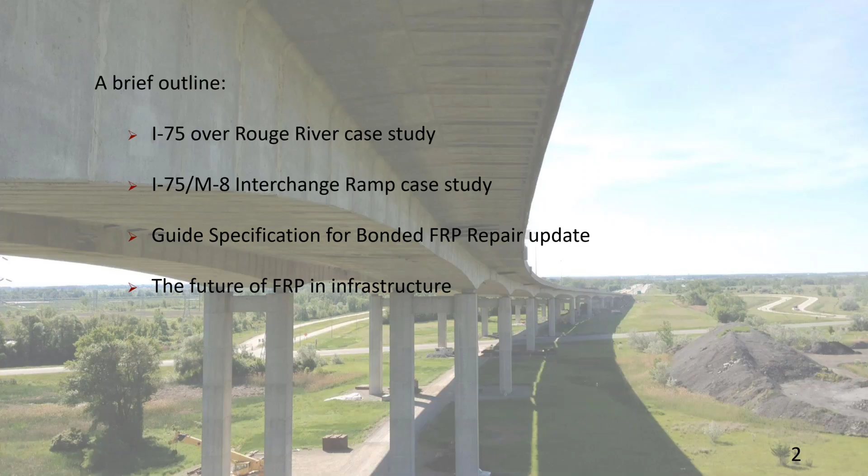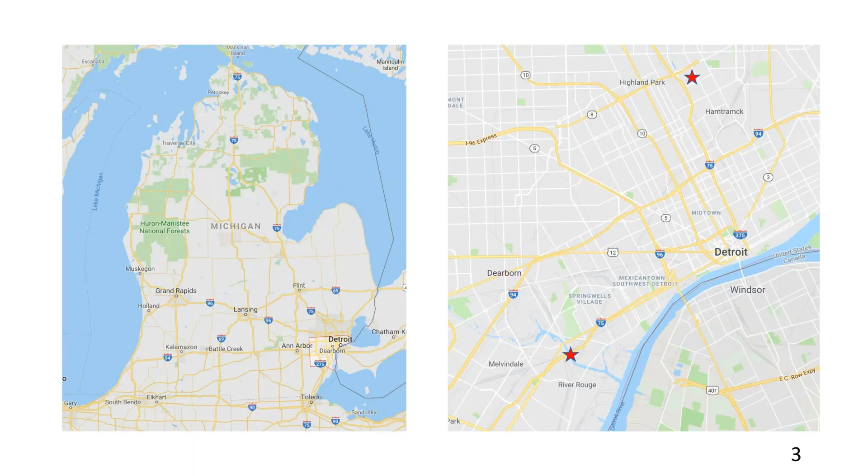So how are these FRP bonded systems relevant to ABC? How is it relevant to our movement towards accelerated construction and less user delay? Well, the use of the bonded FRP systems actually resulted on these two projects we're going to talk about today in no impacts to freeway traffic above and very little impact to the local traffic below, just in terms of staging and equipment access.

So you're driving over the freeway, you would never know that we were working on these bridges. The systems can be installed fairly quickly, either via pre-qualified contract or contractor, as the first one will show, or using direct force maintenance staff, which is how we did the second project that we're going to show today. So the strengthening or confining of these elements is a viable option for long-term asset management, which can delay replacement. If these elements are replaced, that's a huge impact to mobility and traffic. So that's how these systems can be relevant to an ABC type of application.

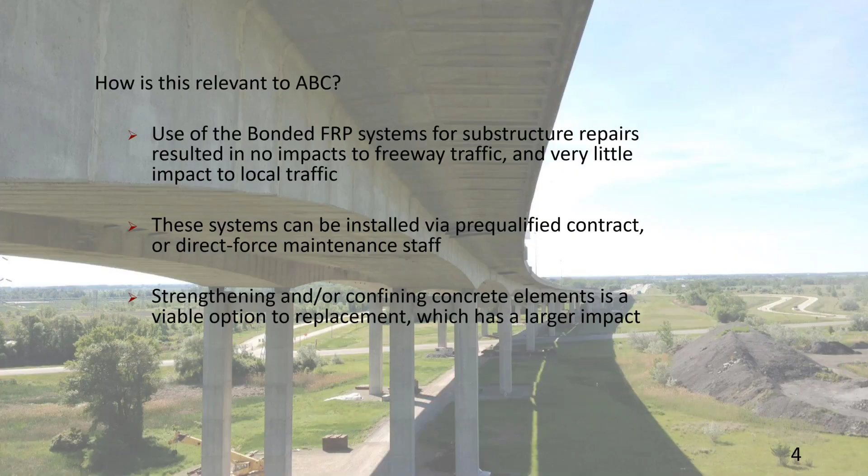So the first project we want to talk about is our I-75 bridge over the Rouge River. This is a 109 span composite steel structure consisting of many cantilever and continuous spans with a main 3-span continuous unit over the Rouge River.

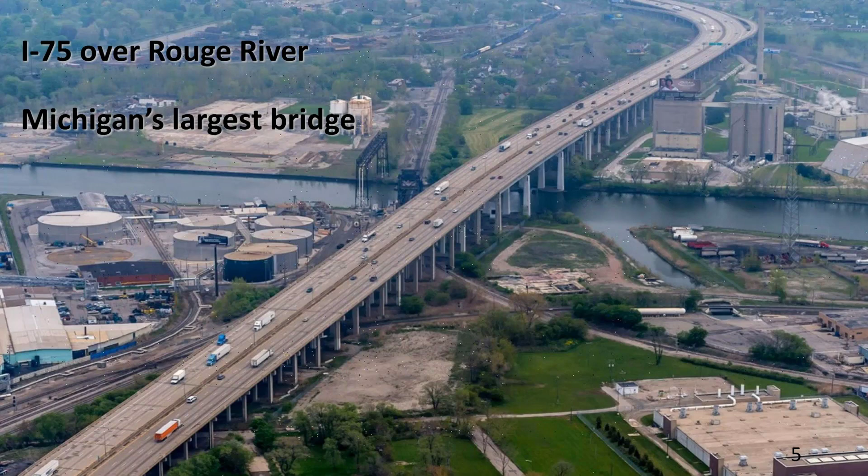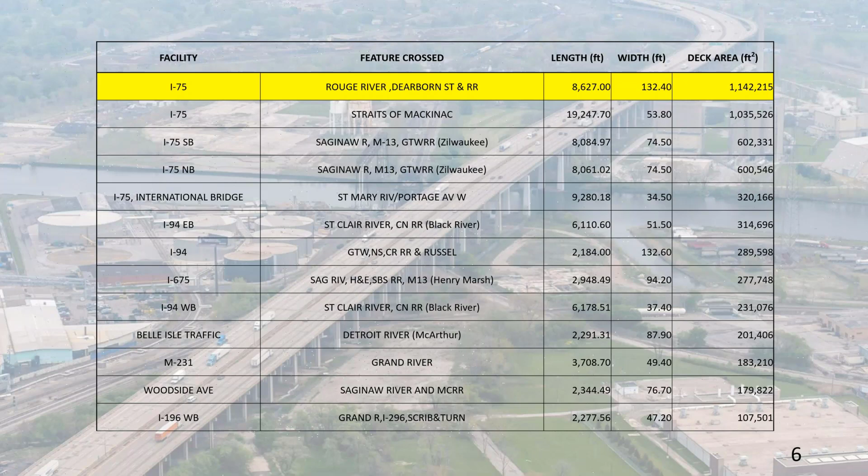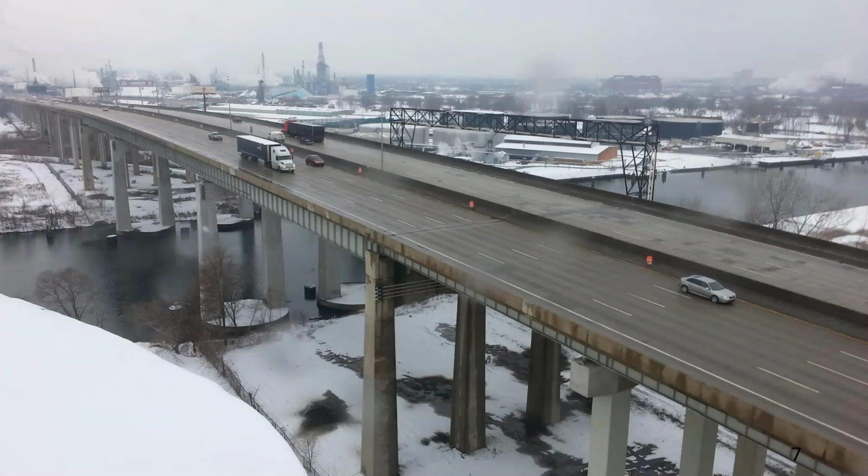So some facts about the bridge: prior to 2018, the bridge was considered to be in overall poor condition. We had a deck NBI rating of 4. However, the steel girder superstructure and the piers were being maintained in good to fair condition.

Knowing that we were going to have to do something with the bridge deck, we set out on a pretty comprehensive asset management plan and looked at all options for rehabilitation. We looked at a deck replacement option, a bridge replacement option, different types of bridges that could cross this, and post-tension segmental. Ultimately what we decided was, due to the fact that this particular bridge represents the lowest point in the Rouge River corridor...

This river has a lot of maritime traffic serving the Ford Rouge facility, and at 110 feet over the channel, this is the lowest crossing of the entire Rouge River basin, so we knew we would have to raise the bridge. There's interchanges on either side of the bridge, on either side of the river at each touchdown point. All of that led to cost estimates in the $400 to $500 million range to replace the bridge.

But again, since the steel girder superstructure is in fairly good condition and the piers can be maintained in good condition through various asset management applications, we ultimately decided to replace the bridge deck. That was about a $100 million project, and I just want to show some cool pictures of what that looked like.

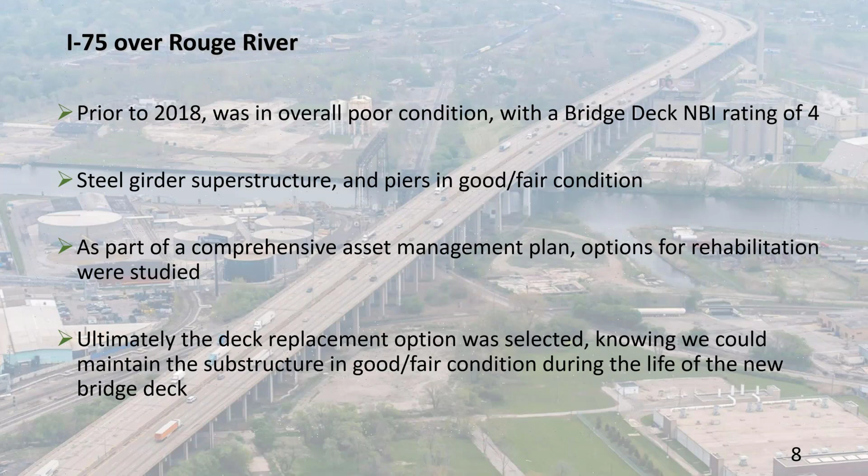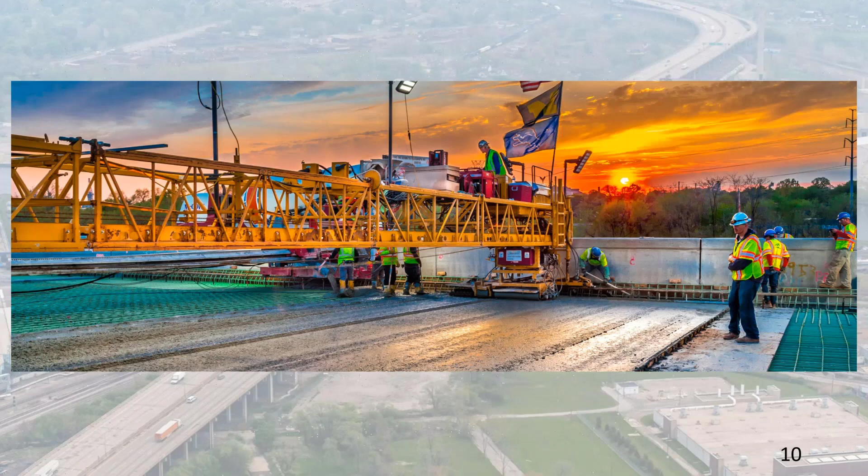So, what we decided to do with the many, the forest of columns and piers that we have out there supporting the superstructure, we've had issues. These particular concrete elements contain slag aggregate, which Steve is going to talk about why that's an issue in a minute here.

So we went out and did a very comprehensive sounding and scoping process for all of our piers, and we developed the plan sheet you see here for a program of using FRP systems for confinement of these columns. As you can see, this applies to piers 24 through 97. We didn't work on all of them, but you can see from the table we worked on a significant number of these piers, some approaching 90 to 100 feet tall.

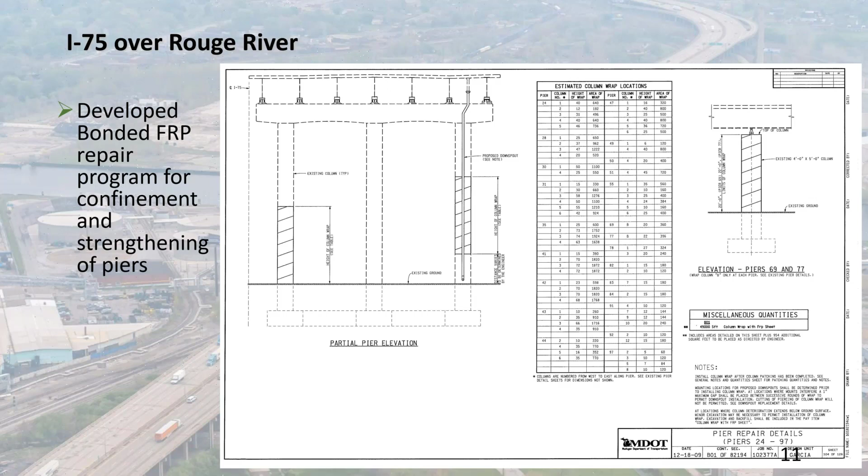We developed a specification for column wrapping. We worked closely with Jim Gutierrez from Caltrans, who's very knowledgeable in FRP systems requirements, and our specification actually addresses the seismic requirements. Even though Michigan is a low seismicity state, we did want to make sure we were following the best specifications out there, and we worked with Jim on those.

This is a specification that just sets up the minimum properties. It's a generic specification. This specification, along with some of the example calculations we're going to show, we're going to make available with this presentation so everybody can have access to this.

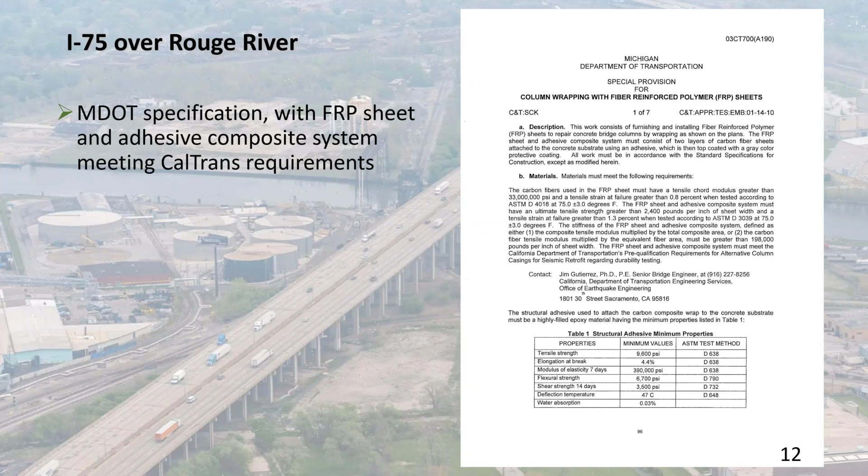We put together this MathCAD sheet, and ultimately we decided - there are two main specifications we could have used here. We could have used the AASHTO guide specification, or we could have used ACI 440.2R-08. Ultimately, we decided to use ACI.

Part of the reason is that AASHTO currently has a fixed FRP strain limit at the concrete-FRP interface of 0.005 microstrain, so you really don't get to mobilize more of what strain the materials are capable of. ACI allows FRP strains up to 0.009 microstrain, depending on the concrete compressive strength, and it maxes out at an allowable concrete compressive strength of 8 KSI.

The other big difference is that AASHTO specifies a fixed strength reduction factor of 0.85, which is quite restrictive, considering that the entire guide specification really limits use of these on flexural members, which have relatively ductile types of failures. Whereas ACI 440 follows the general provisions of ACI 318, which allows different strength reduction factors for a tension-controlled failure - in this case a 0.9 strength reduction factor - and if we had a compression-controlled failure, we could use 0.65. So overall, we thought the ACI specification offered much more flexibility for us.

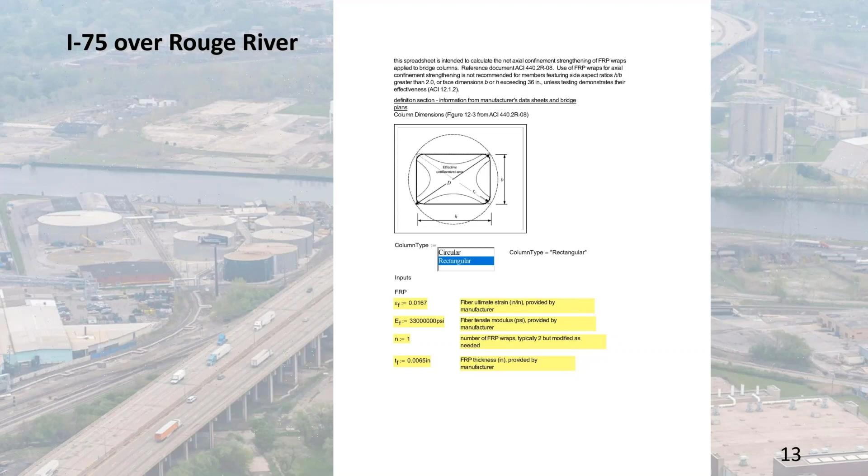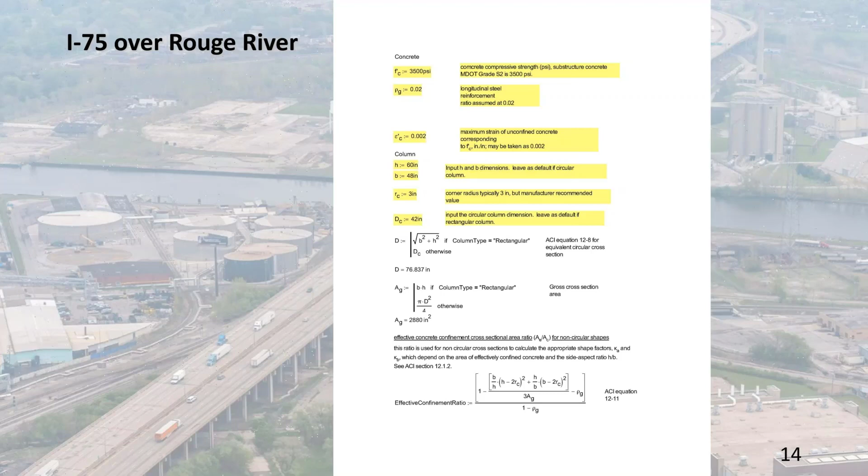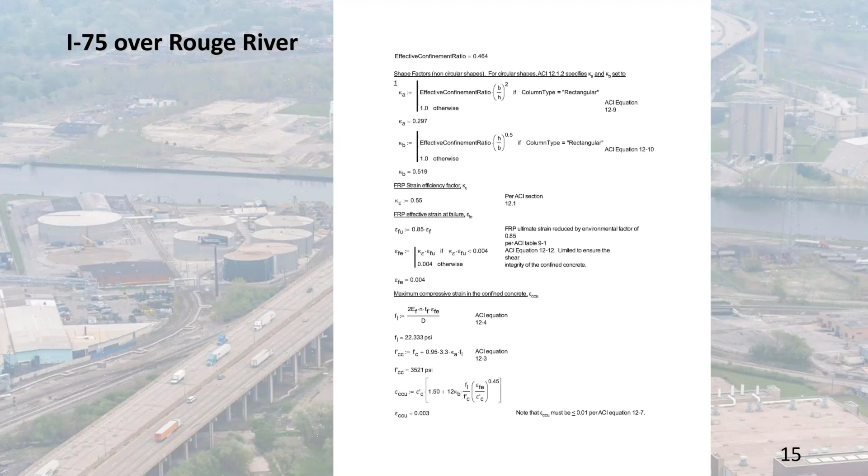As you can see from the sheet here, we do have rectangular columns, so we selected those appropriately and started entering in strain values and the tensile modulus. We go through the inputs for the concrete and the strains in the concrete, and we calculate the equivalent circular cross-sectional area for the column. We calculate the effective confinement ratio per ACI, go through all of the applicable shape factors, the FRP strain efficiency factors, the strain at failure, and then we can calculate the maximum compressive strain in the confined concrete. From there, we get the actual additional capacity provided by the FRP system to the benefit of the column.

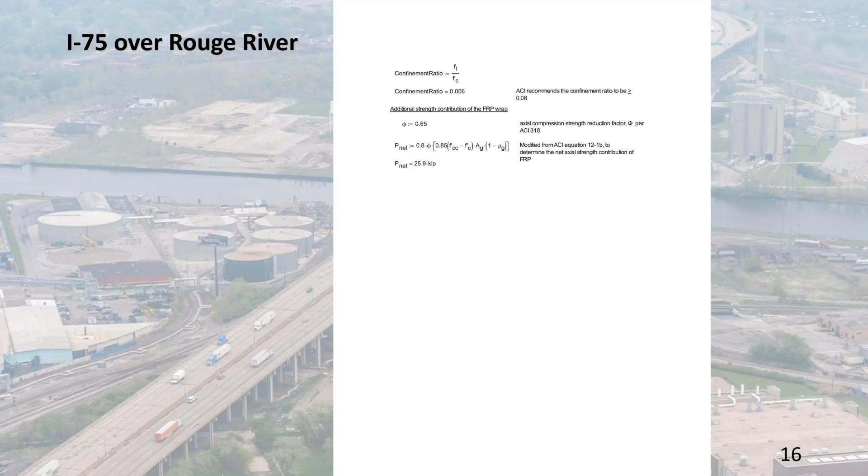So what I'm going to do is turn it over to Steve, who's going to walk through the particulars of why slag aggregate is an issue for us, and then we will go through some of the construction of the project. Go ahead, Steve. Great, thanks, Matt.

This is Steve Kahl, and one of the reasons why we wanted to use carbon fiber as a passive external reinforcement to bolster the repairs is that the slag aggregate is not good for longevity in terms of crack resistance.

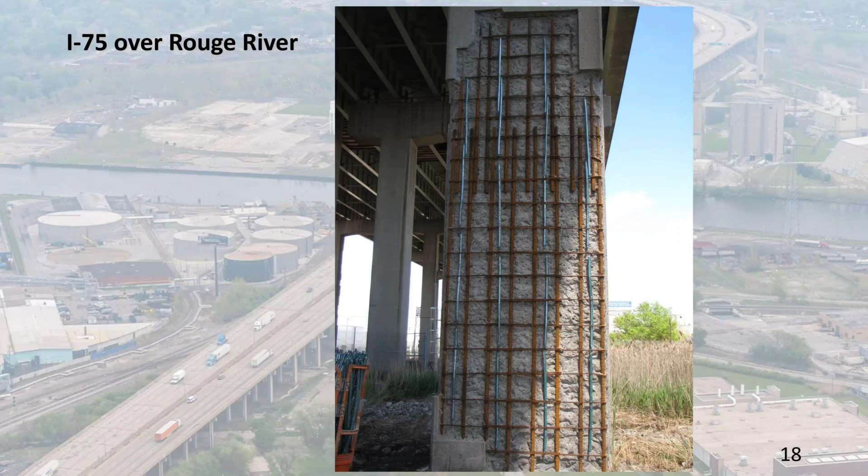So if you do any patch repairs with slag aggregate, you want to first carefully define your removal areas, because if you take a hammer and chip away, you won't be stopping. So you have to carefully lay out the repair area and stay within the confines of that area. You're also going to need a way to maintain or hold that patch in place throughout the life of the structure.

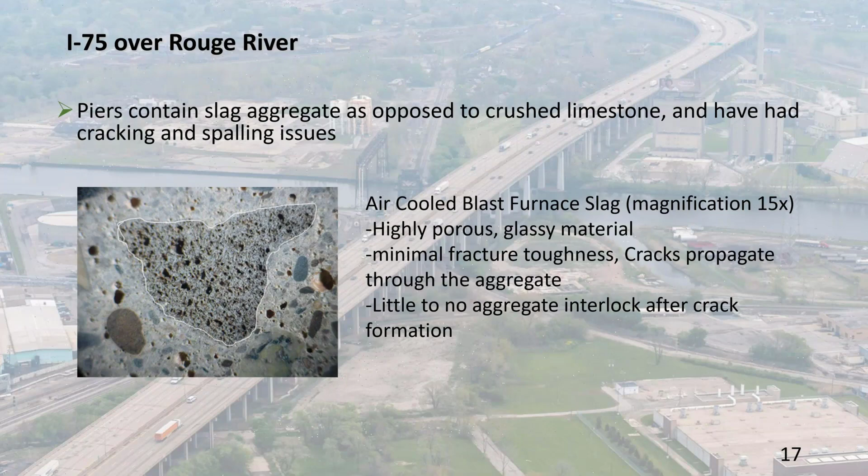So as we can see here, the first step in applying this FRP reinforcement was to remove the unsound concrete from the pier columns and expose the steel for a better bond and performance. In addition to the FRP, we wanted to ensure longevity by placing sacrificial anodes to protect the steel from the ring anode corrosion effect, which combats the issue when you place new concrete next to old. You form an electropotential that accelerates corrosion in the old concrete, so to mitigate that, we threw in the sacrificial anodes.

So you remove the old unsound concrete, and then begin to prepare the column for the FRP wrap. First off, you apply the patch material and let it cure. You want to make sure the edges on square columns are rounded to reduce stress on the FRP, typically a 1-inch radius. Certain manufacturers may specify a preferred radius, some smaller or larger depending on the system, but they're roughly around the 1-inch ballpark.

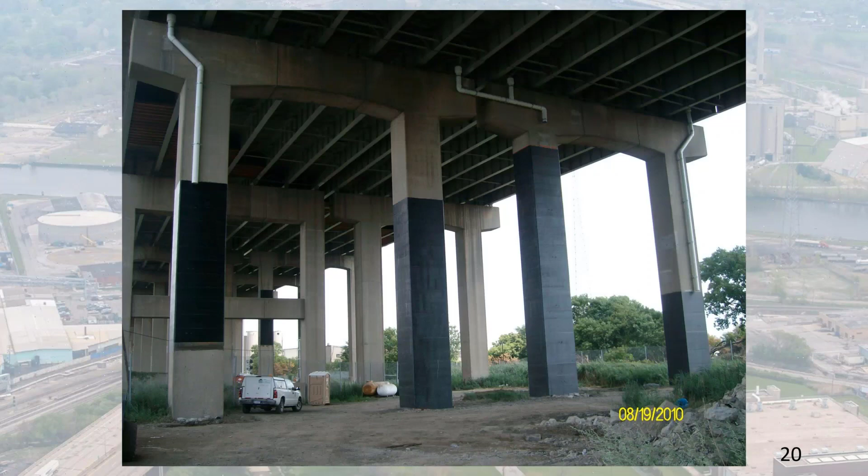So you patch the material, prepare the surface, apply the primer, and then you're ready to apply the wrap. The subcontractor for this project was experienced in FRP work, and the spec required that the contractor choose a specialist that was experienced, with that representative on site for troubleshooting and guidance.

The FRP subcontractor, since they were experienced, used a particular device to ensure the carbon fibers were fully saturated with the epoxy bonding material. They used an impregnating device, similar to old laundry squeegee rollers, where you pass the fibers through a saturated roller system that makes sure the individual fibers are coated with epoxy. Then they carefully place the wraps around the columns and roll them into place to get rid of air bubbles.

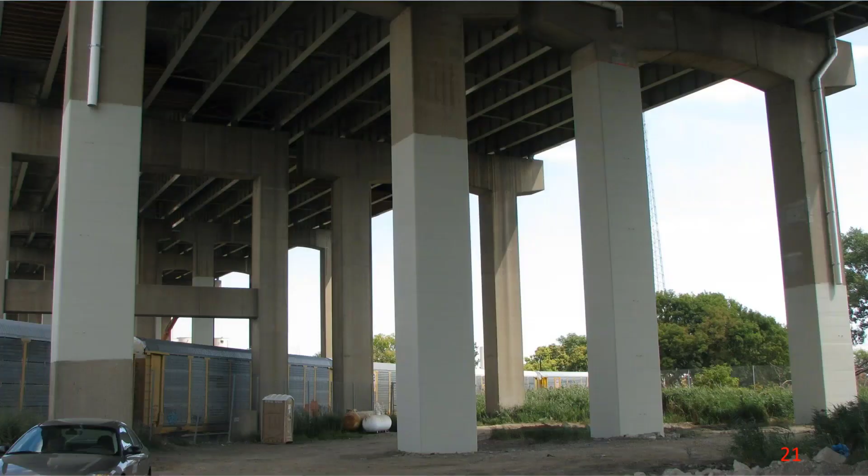After the FRP is installed, typically you put another layer of epoxy on top of the FRP to further coat and make sure the fibers are coated and bonded with the epoxy system. After curing takes place, you top coat it for environmental and UV protection, although the epoxy itself also has chemicals to resist UV degradation. The top coat is generally gray concrete color, and depending on the manufacturer, they'll have specific requirements, either their own brand or a list of compatible products for both aesthetics and environmental protection.

As a summary of the project, it was fairly large, but compared to replacement, not really. This project was about $6.5 million for everything, including 23 rehabilitated pier bents, or a total of 71 columns. Quite a bit of patching concrete was used, almost 500 cubic yards, and 49,000 square feet of FRP reinforcement was applied, all done in one construction season.

Since we were below traffic, we didn't have to worry about traffic shifts or other restrictions. The contractor was originally Posen Construction, now called Z Contractors, and the specialist was called Structural Group. They did quite well.

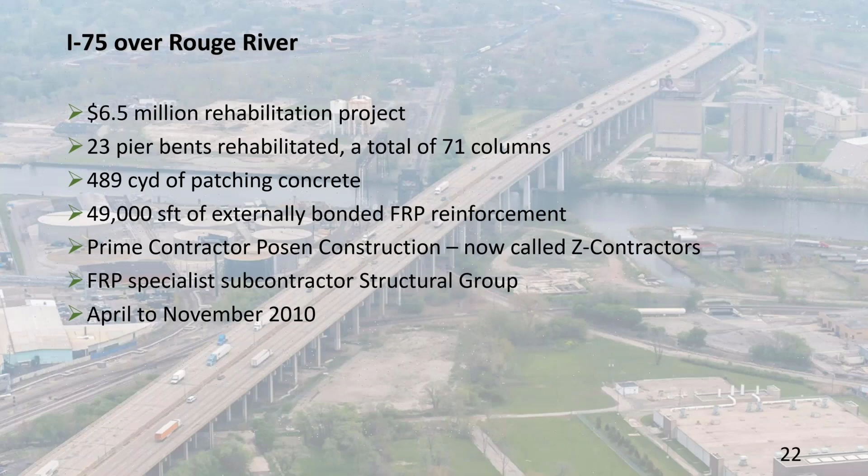Okay, so that represented an example of a project that MDOT did. We designed in-house and let as a capital project. I'd like to show a different example now. This is a project where we worked with a local university to develop a repair scheme, and then our region bridge support folks and direct force maintenance folks did the repairs. And so this is in a very busy interchange on Detroit's north side. The previous project was on Detroit's south side.

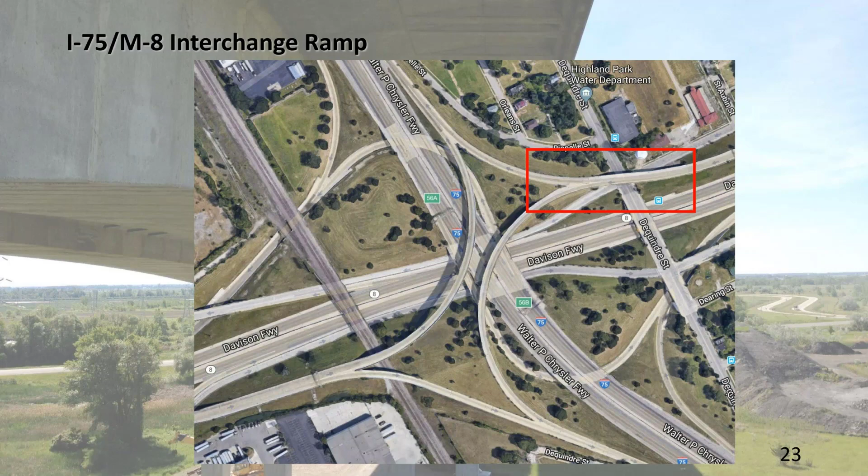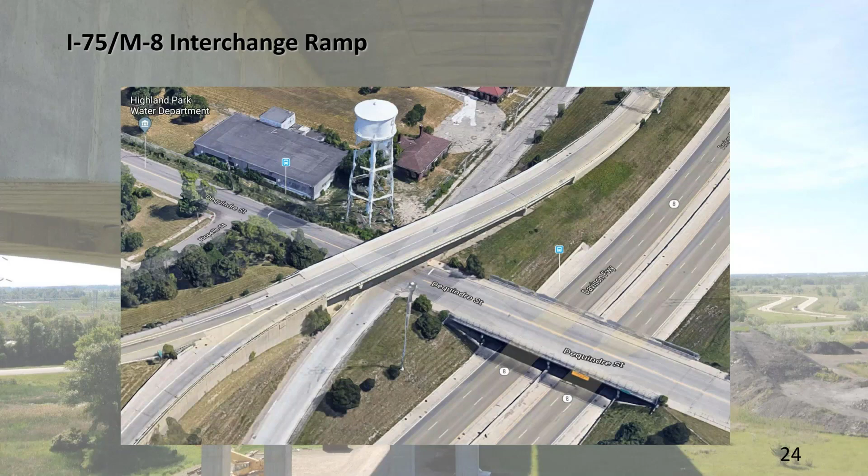So this is our I-75 M8 interchange. This is a full freeway-to-freeway interchange with a lot of complex movements. And what we have on this ramp here is a ramp that takes you from one of the service drives to northbound or southbound I-75. And it's got a very unique configuration. You can see from the geometry there with the service drive coming underneath, we don't have a cap and column type of situation. We have a single column with a very massive knuckle bearing and then intermediate bent. And this is a fixed bent, so it's allowing for rotation but no translation whatsoever.

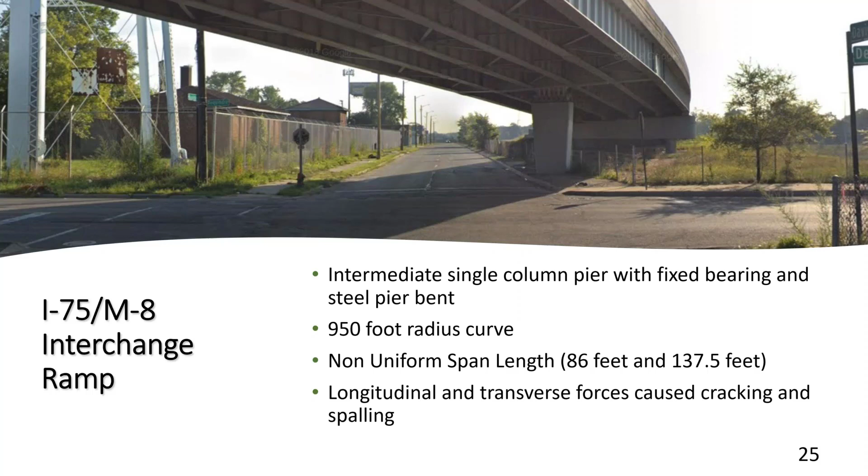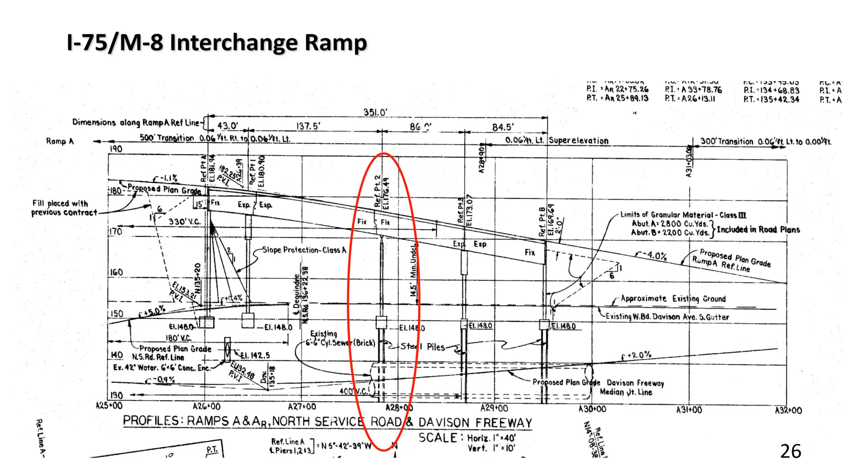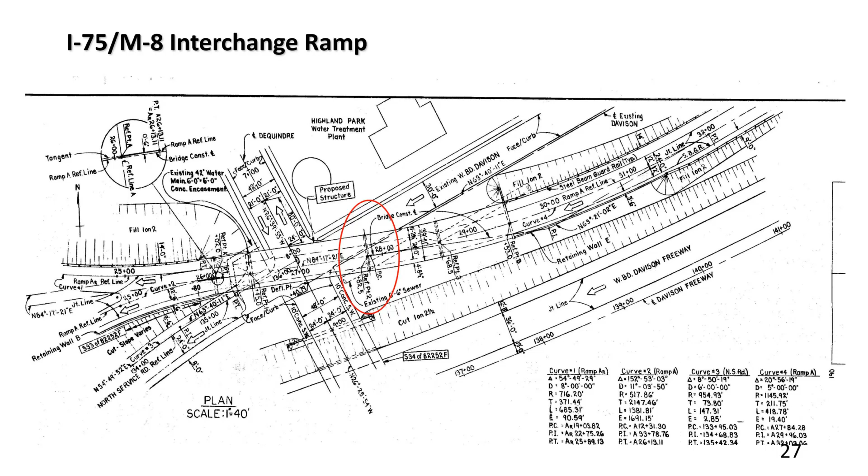It's on a curve, 950 foot. And non-uniform span length, so we don't have balanced span conditions either side. We have an 86-foot span on one side and 137.5-foot span on the other. And so all of these conditions and this structural configuration led to some forces on this column that caused cracking and spalling. This was built in 1967, by the way. And again, just some details here as to the location of the column in profile view. And here is what it looks like in plan view. You can see it's a very short span coming into it, and then a longer span going towards the freeway. At this time, I'm gonna turn it over to Jason DeRuyver, who's gonna describe some of the cracking and spalling that we found, and then the repair procedure that we developed. Thanks, Matt.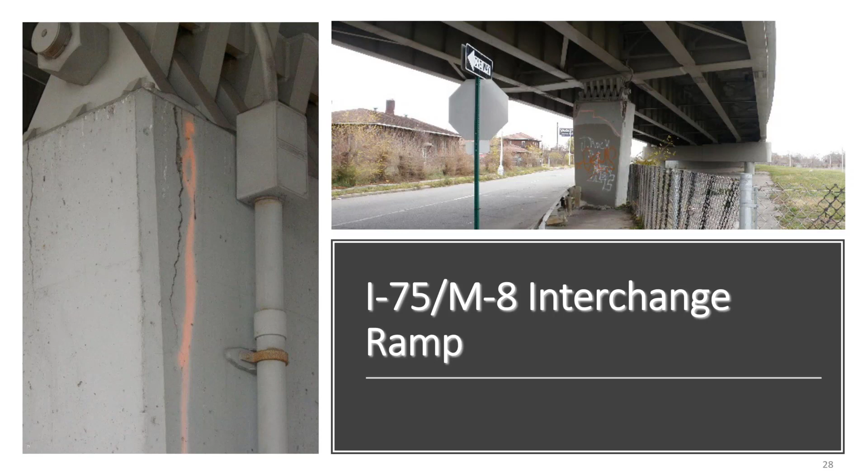As you can see here, the forces Matt was describing caused several cracks and spalls near the top of the column. And we just have a few slides here showing different views of those cracks and spalls. It's basically on all four sides of the column near the top.

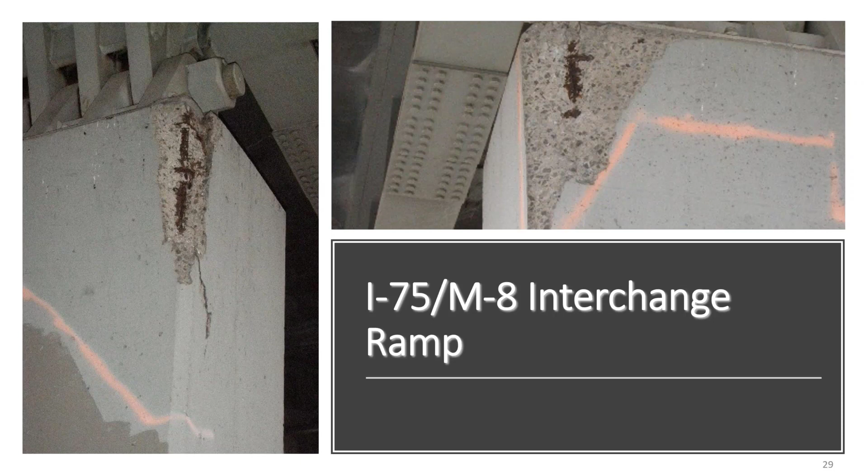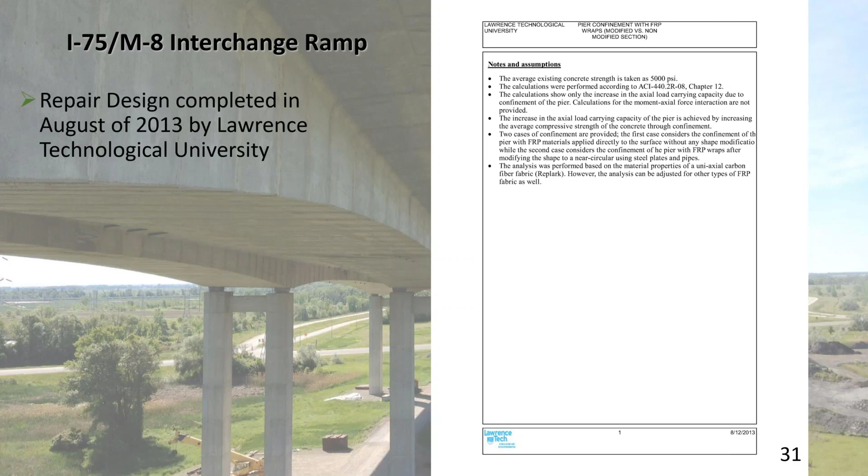All right, in order to do the design, in August of 2013, we reached out to one of our universities, Lawrence Technological University, as an expert in carbon fiber design. And he analyzed the bridge and all the loads, and he came up with the actual design for us and sent us over this MathCAD sheet. As you can see here, we're going to go through this. We will make this MathCAD available on the FIU website, but this just goes through all of the traditional calculations, the material properties calculations. Went through an analysis of the load carrying capacity of the pier on its own, unstrengthened and strengthened.

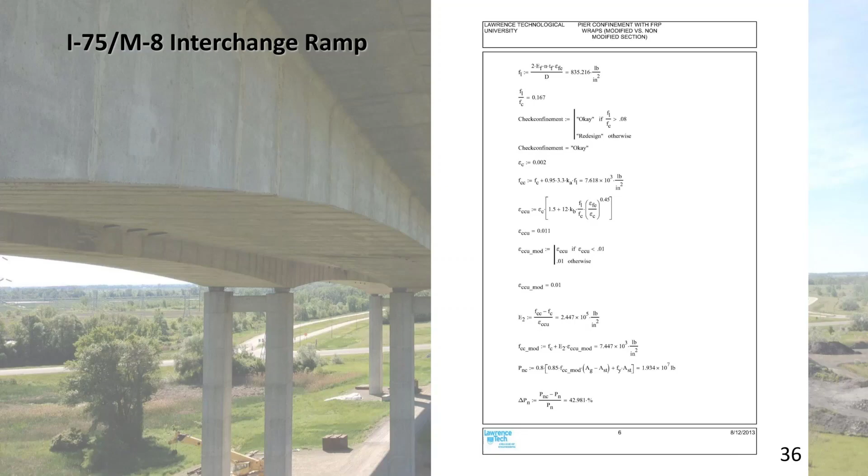Again, just like we did before, this uses the ACI methodology. So we're calculating the strains based on ACI, checking the confinement, calculating our moduli, and then actually calculating what percentage of additional axial capacity this passive system will provide for us. And from all this, we calculated the confinement was okay. It kept strains within the allowable. And again, this is a passive system, not an active system. And so with the total contribution of the new system, we increased the capacity by 42%. And Jason's going to talk through the actual repair of the column.

All right, so before we could install the FRP, a few steps had to happen first. We had to close that local road service drive underneath the bridge in order to install all of the temp supports that we need to unload the column. And then we had to patch the concrete.

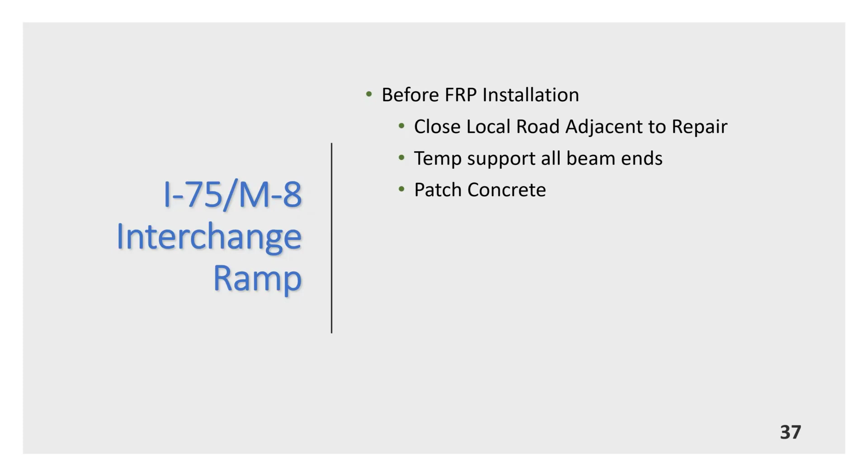Hit the fast forward button here. You can see that the concrete is patched. And what I'd like you to notice here is that the edges of the concrete patches are pretty rough and irregular. And also that we didn't use any special patching concrete. We just used the standard 4,500 PSI mix that MDOT specs out.

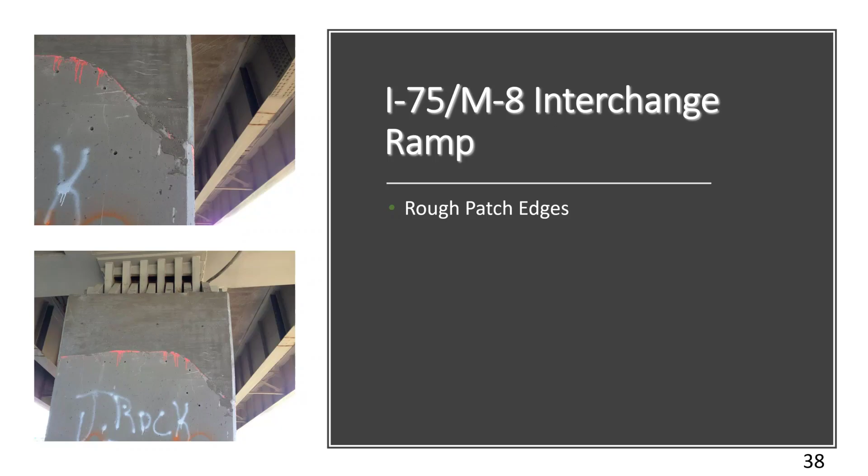Here we are preparing the column surface with a grinding wheel. And also, after we ground all the edges of the patches and all the surface irregularities, we then needed to go in and grind the corners. The fabric we were using required only a 3/4 of an inch minimum radius.

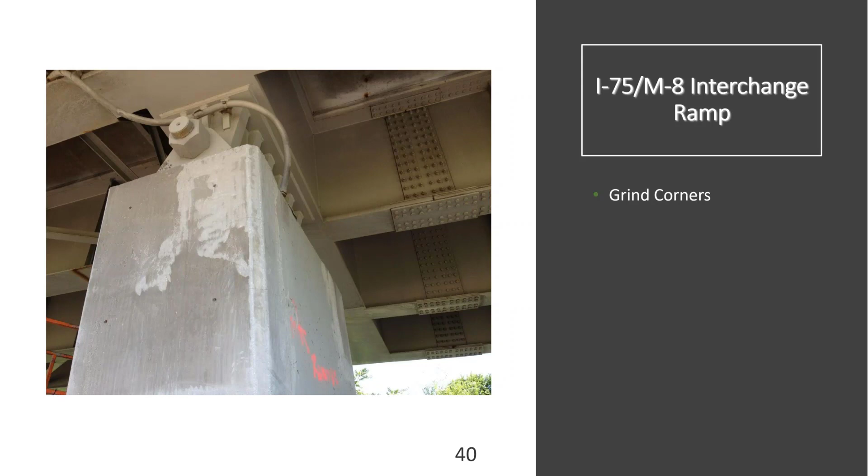In order to finish the concrete surface preparation, the surface needs to first be sandblasted to a minimum ICRI surface profile of CSP3. Basically, that is just removing all dust, dirt, bond-inhibiting compounds such as oils. And then after preparing the substrate with a light sandblast, what we see here in the picture is we're applying the first epoxy that gets applied, and this is the primer.

The CSP3 shot blast also opens up the pores of the concrete to allow the epoxy to soak into the surface better, but we don't want to be more aggressive than that with our surface preparation, because then we start introducing more surface irregularities.

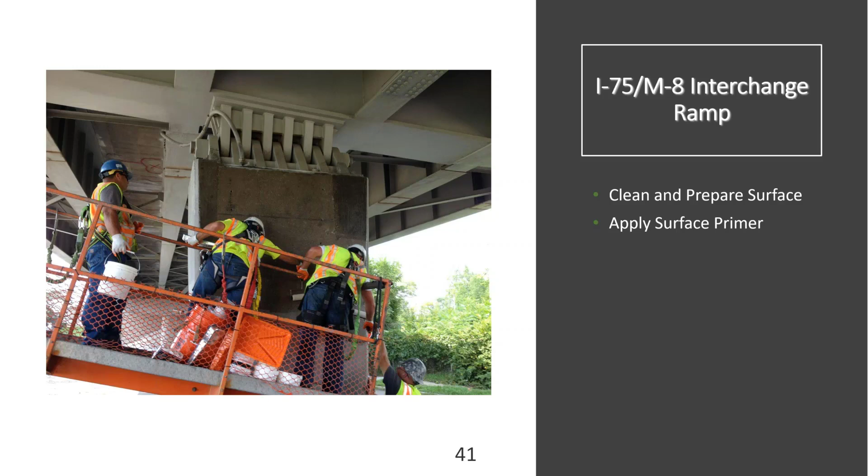So again, we did the CSP3 to just clean it and not have a lot of surface irregularities, so that we don't use as much of what we are seeing here in the next step, which is the epoxy leveling putty. This basically fills in all the little tiny surface imperfections, voids, bug holes, to get a better adherence to the concrete. This is applied immediately after applying the primer. There's no cure time to wait in between.

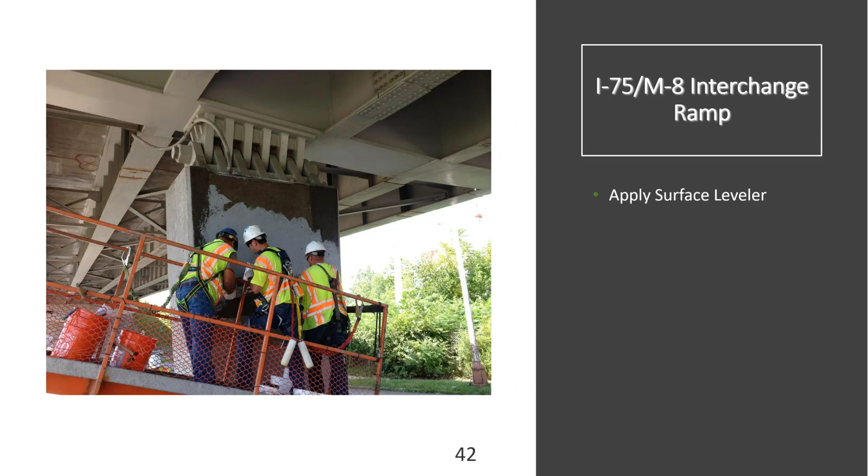Immediately after applying the epoxy, we're applying a layer of the saturant. The saturant gets applied just basically using standard paint rollers. And then every manufacturer, based on the thickness of the fabric you're using, will give a recommended coverage rate. For the fabric we were using, we estimated a rate of 45 square feet of coverage per gallon of epoxy.

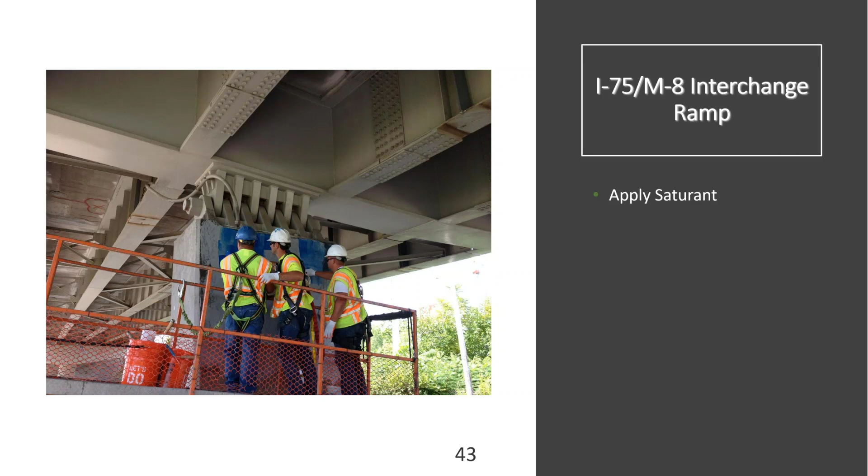So once the first coat of saturant is applied, we applied the fabric to the saturated surface. While the saturant was still wet, any ends that we had needed to be lapped 4 to 6 inches, depending on the design requirements, the fabric thickness and what the manufacturer recommended.

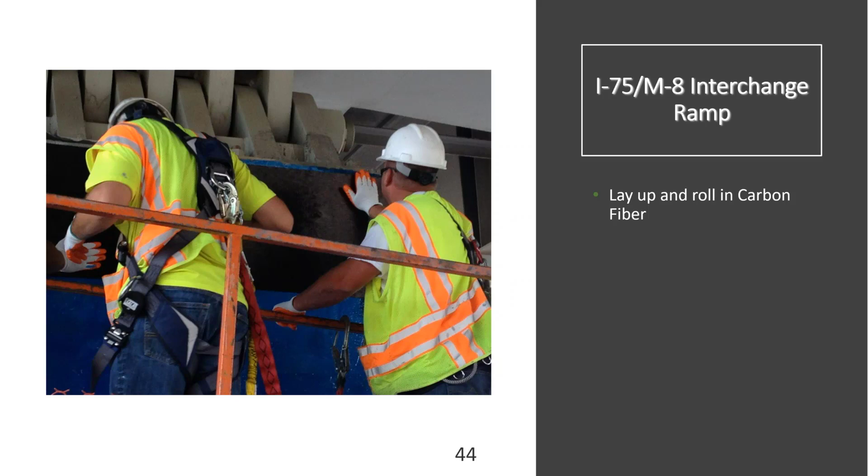After the fabric is hung, we used a rib roller, rolled across the surface of the fabric in the direction of the fiber, helping to remove the air bubbles. The rib roller also presses in the fibers to help ensure they are fully encapsulated in the epoxy. The fiber should be rolled until the saturant starts to bleed through the fabric. After the fabric is set in the saturant, it is then coated with an additional layer of saturant to finish encapsulating the fibers.

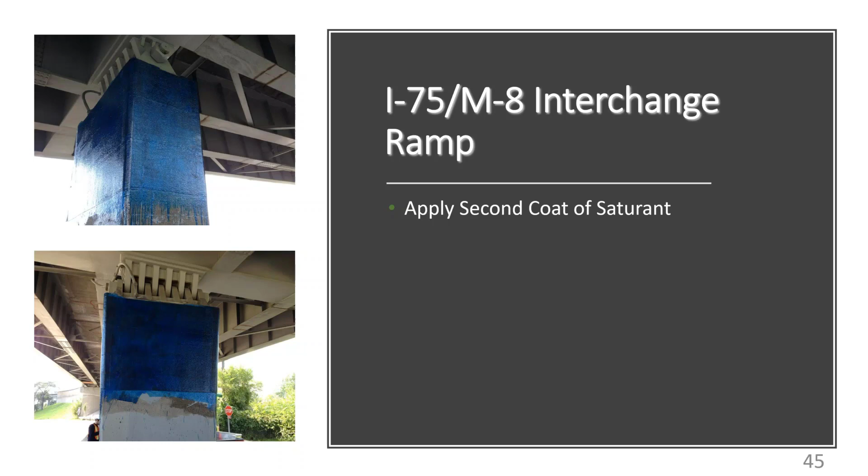Lastly, since this was adjacent to traffic, we decided to coat the entire column with a colored concrete surface coating. And as you can see in the picture, you can barely see where the repair area was.

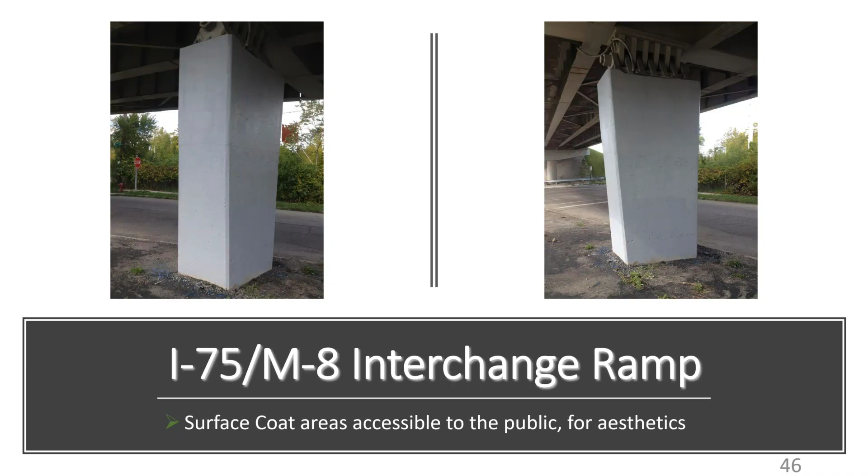Project summary: the carbon fiber design was completed in August of 2013, and the design and construction of the detour and temporary beam end supports was completed in August of 2014. The concrete was patched by state forces in August of 2014, and then the FRP was installed after the concrete cured for 28 days. And the FRP only took us 1 day to install, and the cost of the carbon fiber materials was only $2,470.

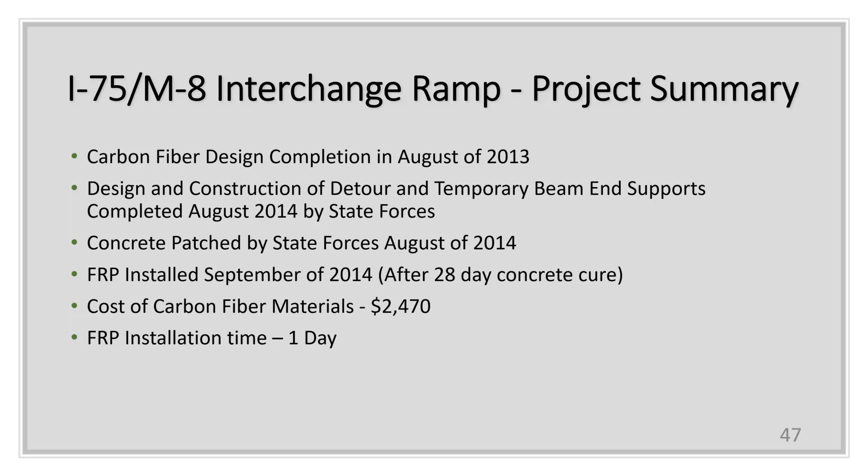Lessons learned. It's quite complex engineering, as you saw earlier, but it is really a simplistic installation. Our state maintenance crews, and I'm guessing your state maintenance crews also, are very capable of doing a repair like this. And the one unique thing I needed to throw in here is I had to sign an end-use agreement when I bought the carbon fiber to promise I wasn't going to use it in the manufacturing of weapons of mass destruction.

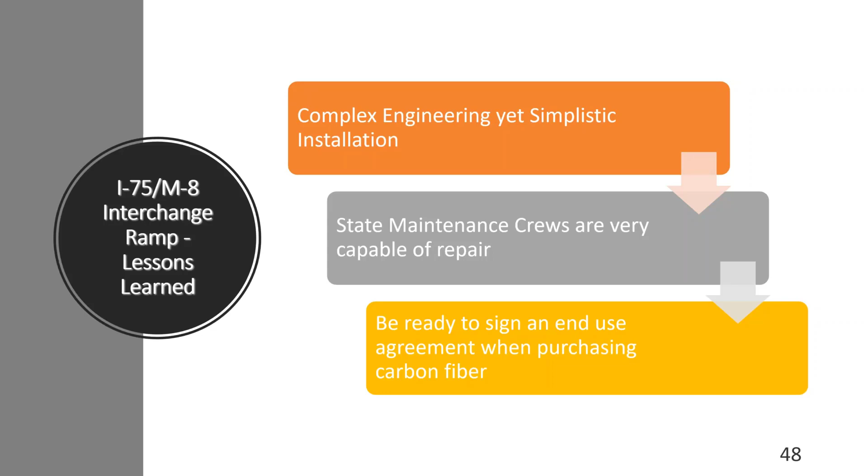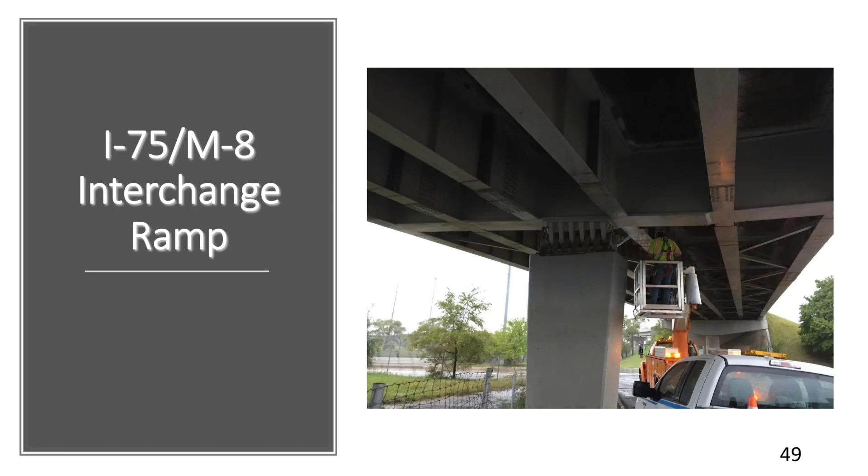Excellent. Thank you, Jason. So just 2 quick things here to wrap up. As I mentioned earlier, these 2 examples both use the ACI methodology, and we do have an AASHTO guide specification for the design of bonded FRP systems for repair. It was first released in 2012, and it's not being used as much as I think it should. I think this should be a go-to, especially for a lot of us that are AASHTO states.

So the T6 committee for the Committee on Bridges and Structures, that's the FRP Composites Committee. I am the chair of that, and we developed a research needs statement, and it was selected by NCHRP. It's going to be an NCHRP 20-07 task 428, and we are going to update this. We're going to put together a second edition.

And we're basically going to try to unify the AASHTO and ACI provisions. We want to also ensure engagement with industry so that there's alignment with what industry can manufacture and develop for us. We also want to update it to include near surface mounted strengthening applications. This is another one of those very popular things that's done out in California, and Jim Gutierrez does a lot of work with that. And we obviously want to make sure that the AASHTO specification is using the appropriate strain compatibility requirements, and we're not limiting the strains on the material to something too artificially low.